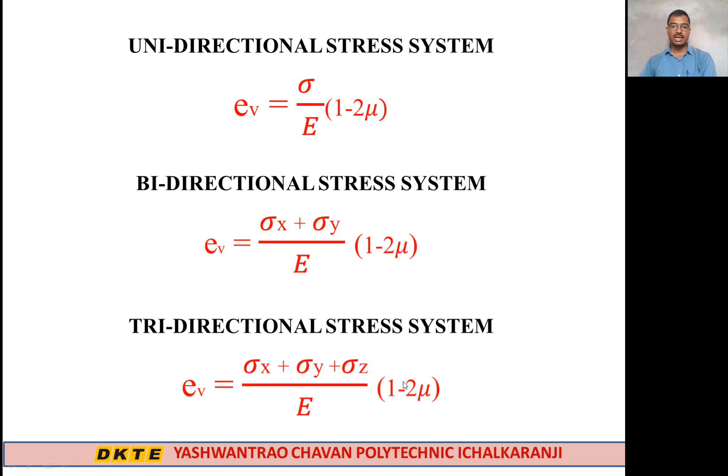The first problem: in a biaxial stress system the stresses along two directions are sigma x 50 Newton per millimeter square and sigma y 30 Newton per millimeter square, both tensile. Determine strain along these directions. E is equal to 2 into 10 raised to 5 Newton per millimeter square. Poisson's ratio means mu is equal to 0.3.

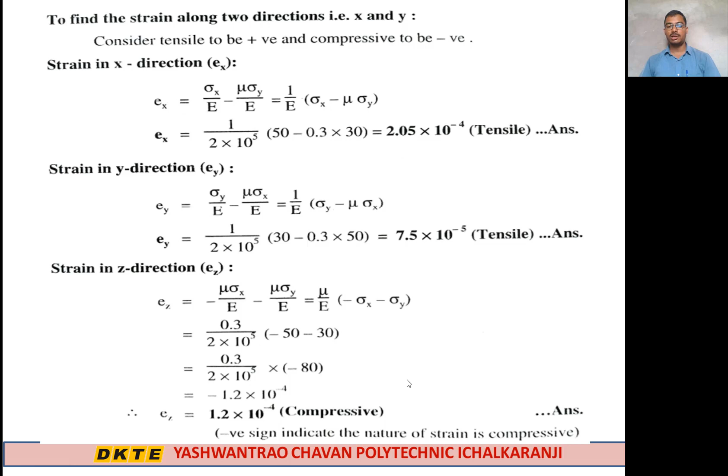Second problem: a steel cube block of 50 mm side is subjected to force of 6 kN tensile, 8 kN compressive and 4 kN tensile along x, y, z respectively. Determine change in volume of the block. Take E is equal to 200 GPa and M is equal to 10 by 3.

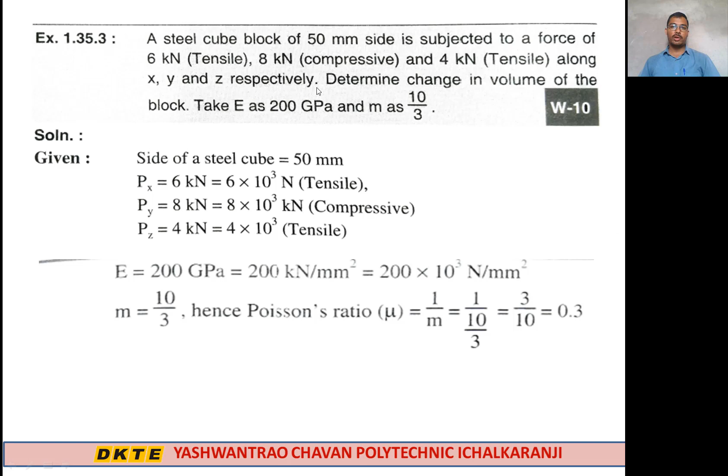We have to calculate change in volume means dV. We have to calculate dV.

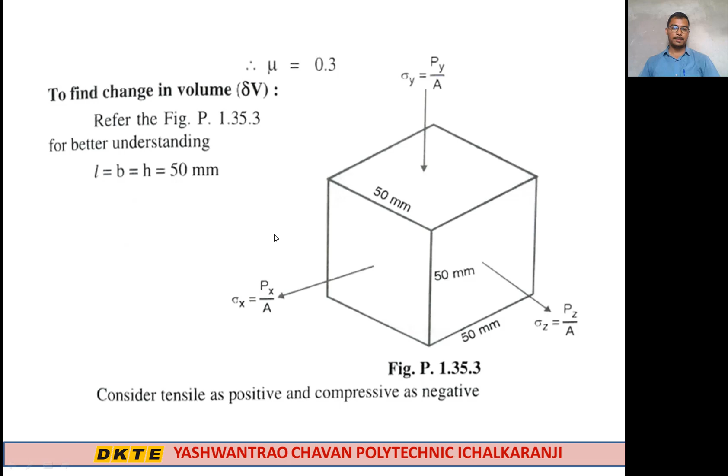Similarly, stress in y direction, load in y direction upon area. This is negative because this is a compressive load. Therefore, this is minus 3.2 Newton per millimeter square. And stress in z direction, load in z direction upon area, it is 4 into 10 raised to 3 divided by 50 by 50. 1.6 Newton per millimeter square.

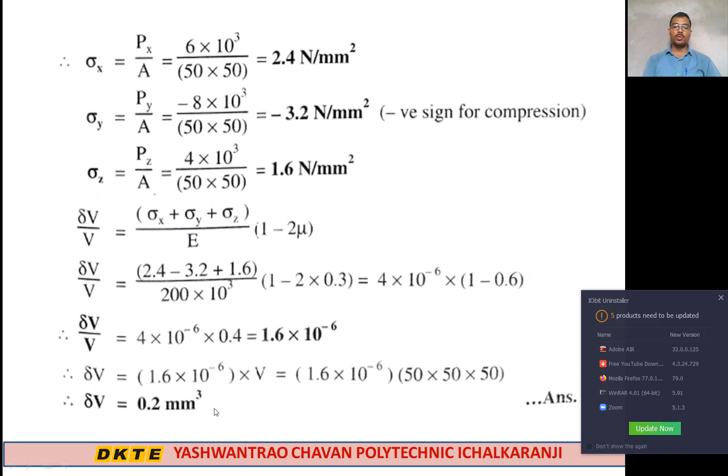The value of this total is 1.6 into 10 raised to minus 6. And we have to multiply V towards the right hand side. V means volume of the block. Volume is 50 by 50 by 50. Therefore, dV is equal to 1.6 into 10 raised to minus 6 into 50 into 50 into 50. We will get 0.2 millimeter cube. That means change in volume is only 0.2 millimeter cube.

Third problem, a cube of 200 mm side is subjected to a compressive force of 3.6 meganewton on each face. The change in volume is found to be 5125 millimeter cube. Find E and K, 1 upon M is equal to 0.25. We have to find out Young's modulus E and bulk modulus K.

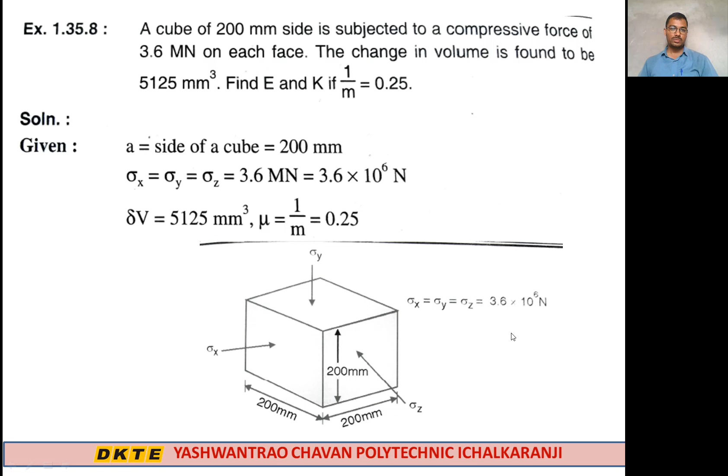A is equal to side of a cube, that is 200 millimeter. Stress in x, y and z direction is 3.6 meganewton, mega means 10 raised to 6. dV is given 5125 millimeter cube, mu is given 0.25. We have to put this value in the tri-directional stress system. dV upon V is equal to sigma x plus sigma y plus sigma z upon E into 1 minus 2 mu.

But sigma x, sigma y and sigma z are each equal to sigma, because their values are the same, 3.6 meganewton, and that is compressive, therefore we have to use it as minus. That is, dV upon V is equal to 3 sigma upon E into bracket 1 minus 2 mu.

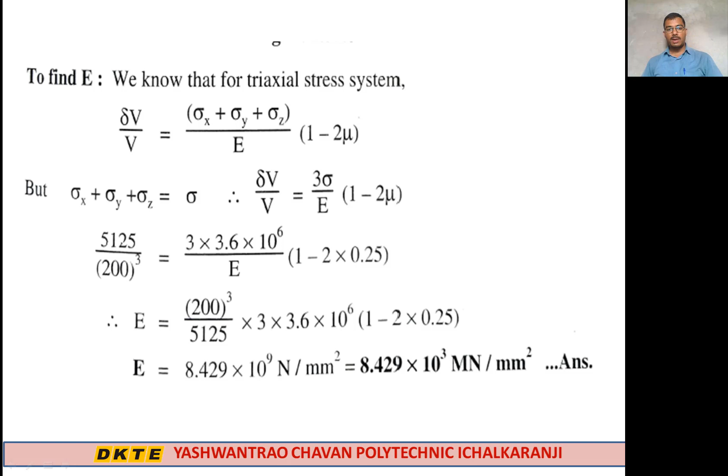We know dV is equal to 5125, volume is 200 into 200 into 200, that is 200 cube, 3 sigma is 3 into 3.6 into 10 raised to 6, E we have to find out, and mu is 0.25. After solving this equation, we will get E is equal to 8.429 into 10 raised to 3 meganewton per millimeter square, that means 8.429 into 10 raised to 9 Newton per millimeter square. By using this, we can find out the value of K.

Next problem. Calculate the strain induced in a cube of 400 millimeter side in X, Y and Z direction if it is subjected to 300 Newton per millimeter square tensile in X direction, 500 Newton per millimeter square tensile in Y direction, and 200 Newton per millimeter square compressive stress in Z direction. Side is 400 millimeter, sigma x 300, sigma y 500, and sigma z minus 200 because this is compressive. E is 2 into 10 raised to 5, mu is 0.25.

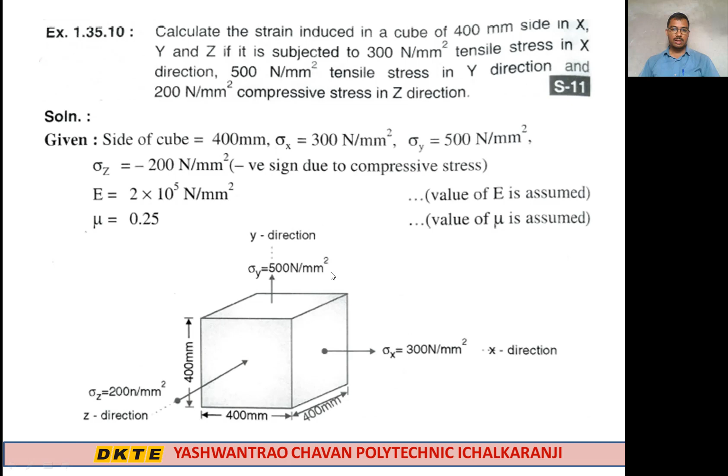Next, to find strains in all directions, consider tensile as positive and compressive as negative. ex is equal to sigma x upon E minus mu sigma y upon E minus mu sigma z upon E. 1 upon E gets common, into bracket sigma x minus mu sigma y minus mu sigma z. Putting the values, we get ex is equal to 1.125 into 10 raised to minus 3, tensile. This is the strain in X direction.

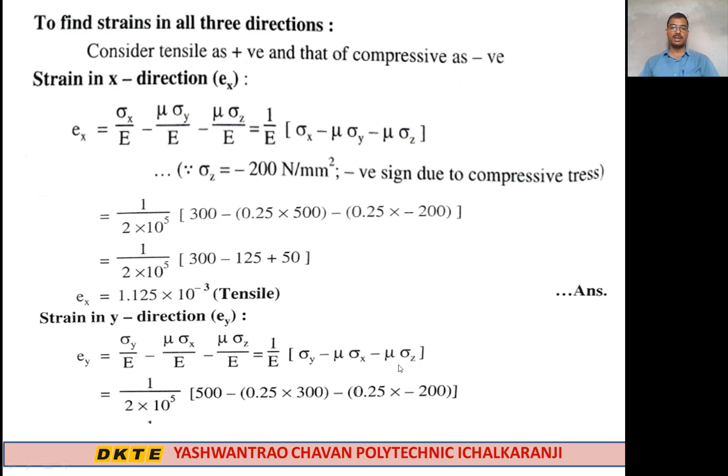Similarly, strain in Y direction: 1 upon E gets common, sigma y is taken as positive and remaining two negative, minus mu sigma x minus mu sigma z. Putting the values, we get ey is equal to 2.375 into 10 raised to minus 3, that is tensile.

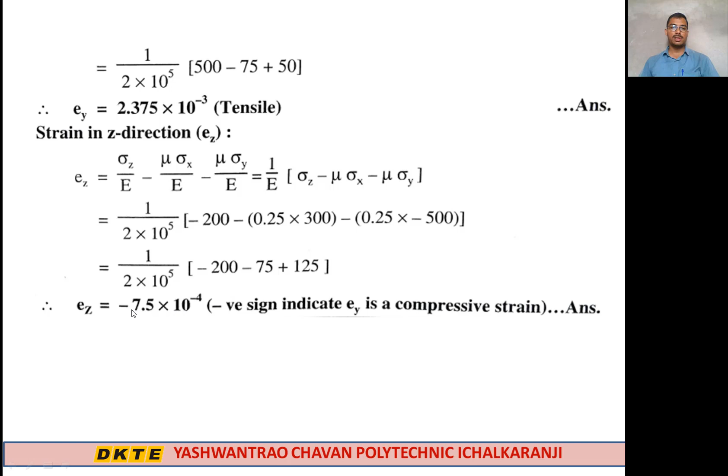And strain in Z direction, ez is equal to 1 upon E into sigma z, only Z direction is positive, the rest negative, minus mu sigma x minus mu sigma y. Putting the values, we get ez is equal to minus 7.5 into 10 raised to minus 4. Negative sign indicates this is a compressive strain.